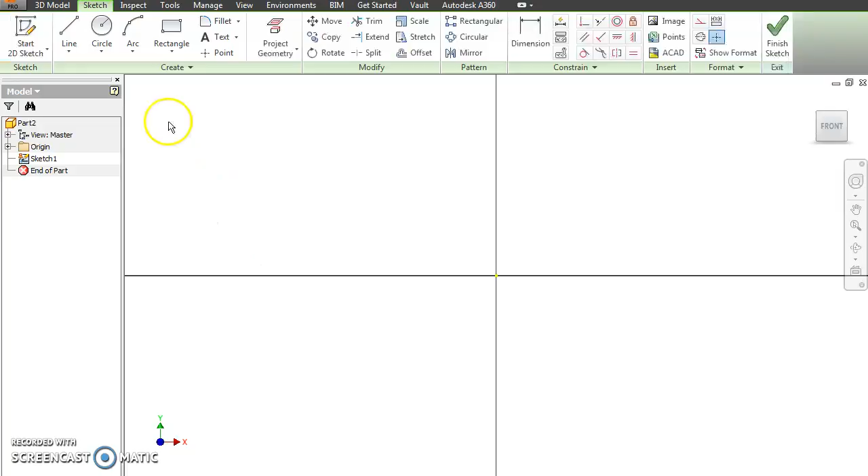Basically, what loft does is it takes one shape, and it has to be a closed shape because it's just like an extrude, and then matches that to another shape and kind of blends between the two. So let's start a 2D sketch, and I'll do something similar to what we have in the exercise. We'll make a block and extrude that. We'll go quite that far.

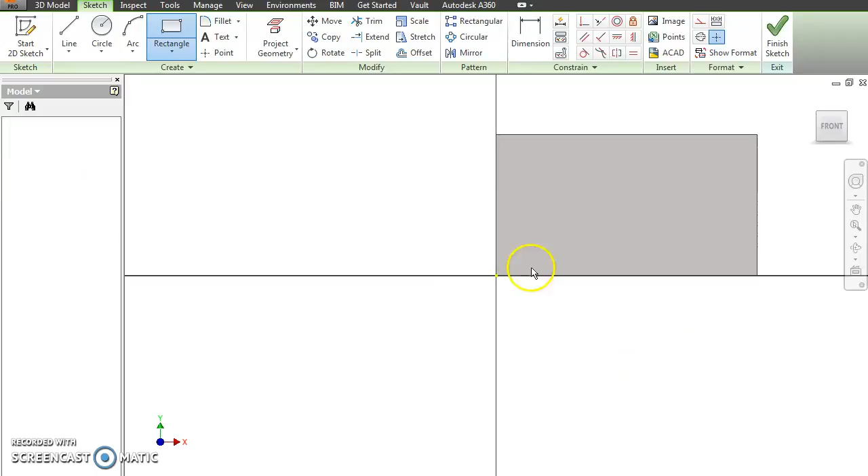There we go. So you start off with a block, and now we have to cut two different V shapes out of it. What I tell people is to start simple, all right? So go with just 3 lines, no dimensions to start off with.

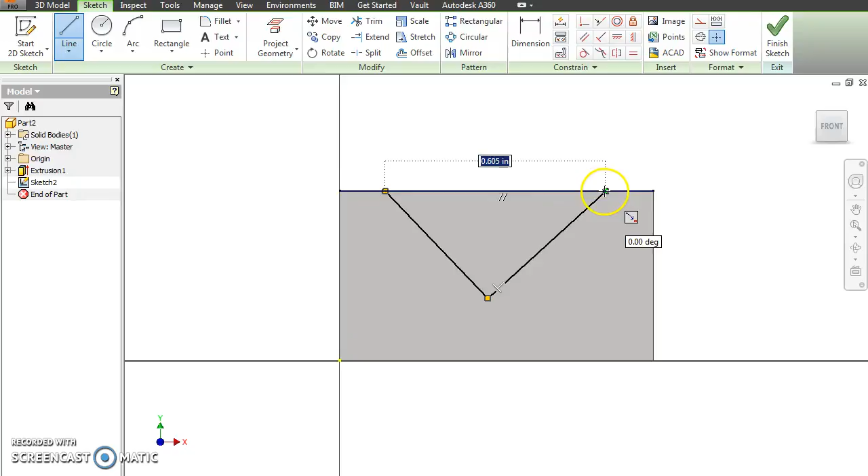Because you want to make sure this is closed. Most times, 9 out of 10, maybe even more, when this goes bad, it is because you have drawn it wrong, so you either have extra lines or the lines aren't closed. So once you get 3 lines and 3 lines only, what you want to do is grab the corners and see that they move, so it doesn't open up. Grab each of the corners, and you'll notice the sketch stays together.

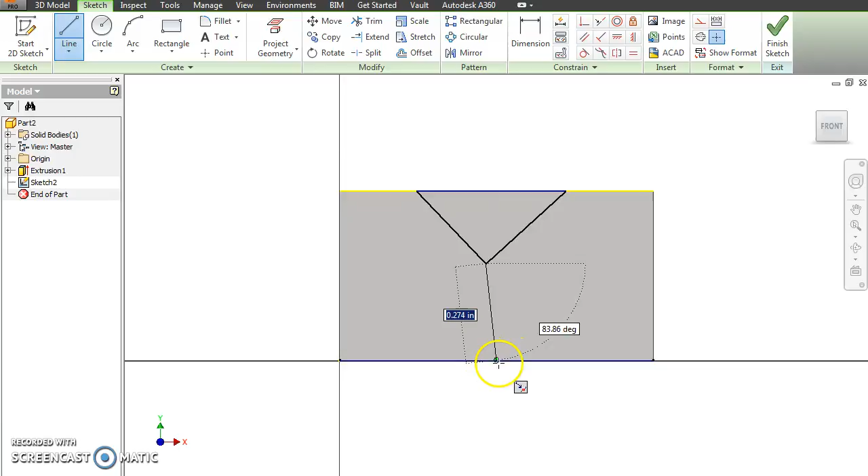The other place, the other 1 out of 10 times a problem occurs, is you want to put this in the middle, so you go from the end of that point to the midpoint of this one, and say I want this to be vertical, and that works great. But you forget to change this to a construction line, and then you can't tell where's the inside and where's the outside. So right click to give that construction, and that's going to work.

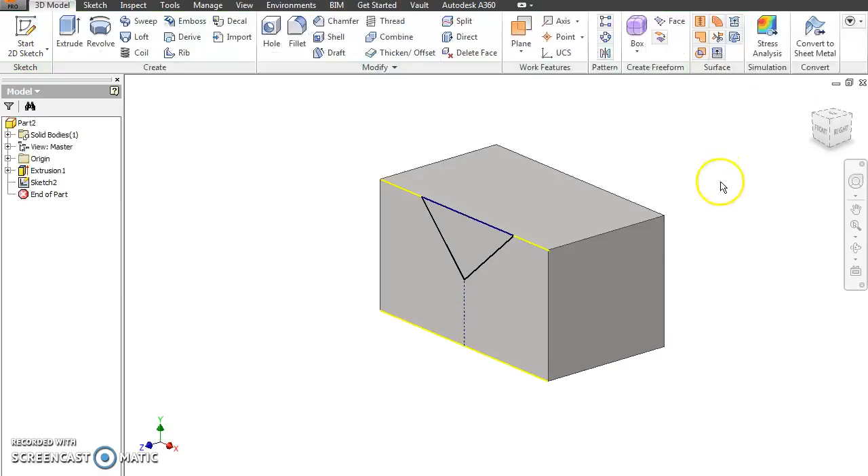I personally leave off all the dimensions because it makes it easier to debug at the very start. So let's finish that sketch, go around to the back side, make another sketch, and I'm going to lay in the 3 lines.

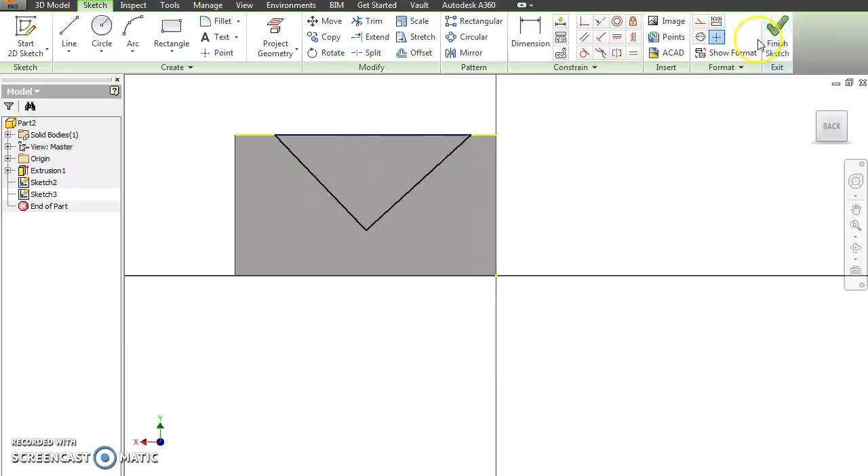Got those laid in, test it, drag it around, make sure they don't open up on you. There we go. You can drag it around and then just undo, and it all goes back, so it's all good, it's all cool. Once again, no dimensions. Finish the sketch, and now we're going to go to the Loft command.

So we click on Loft, drag this over to where we can see it, and here it doesn't automatically do it for you like Extrude does. So we're going to say sections. Remember, it goes from section to section. So we click to add, and then pick a section.

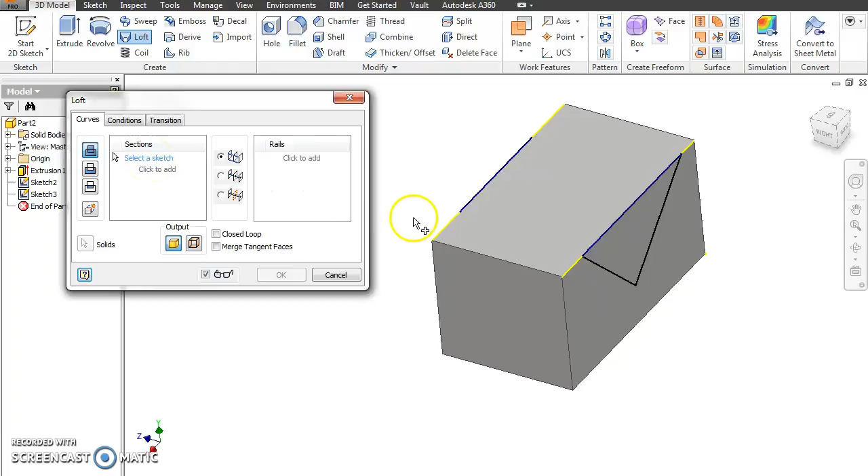So we're going to pick this section, and when we pick it, if it works, it changes colors. If it doesn't work because you have a problem, either it's open or you have multiple lines and can't figure out which line you want to do, it will simply not work. It will not allow you to add it in.

Same thing here. If you click to add and then click on the sketch, if it doesn't work, this doesn't appear, this doesn't add the second sketch. It just kind of seems to fail. So make certain that you have a closed sketch with no extra lines, and all your extraneous lines that are helpful to build it are construction lines.

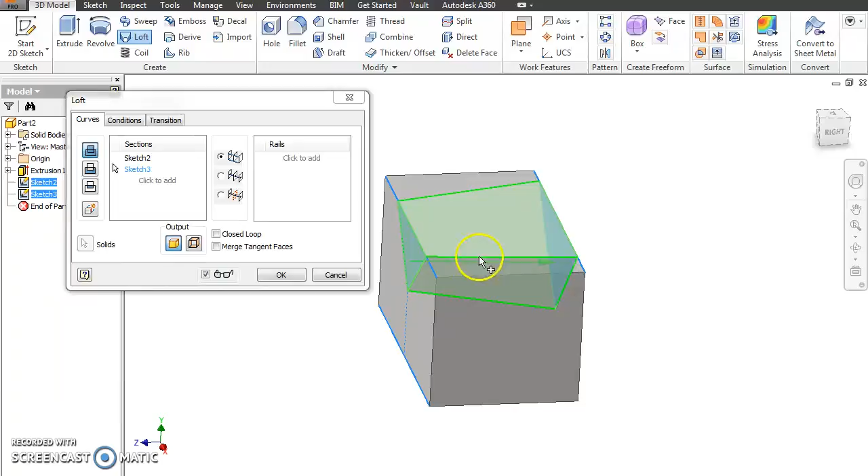So once you do that, you can see it takes that first sketch and maps it back. It just makes a straight line between it. I see kids putting a line in—you don't have to do that. It does it all automatically.

Let's tell it to cut, and it's going to cut through, so you can see it cuts through. Now what you can do is open up your Loft, right click your sketch, and now you can go back in and start putting in dimensions. That way you know it all works.

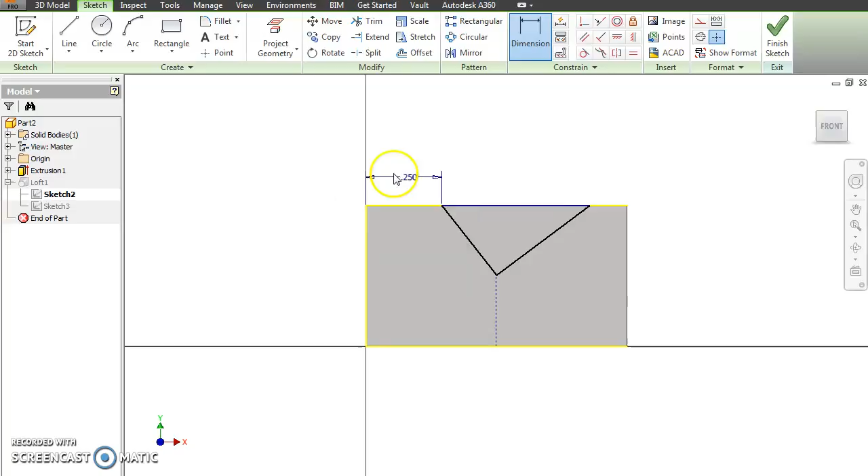So let's say 0.25. I have no idea what these dimensions really are, you have to look down at the exercise. I'm just currently making them up because it looks pretty good. And let's say, oh, that's already defined. So there we go. So finish the sketch, and it automatically updates.

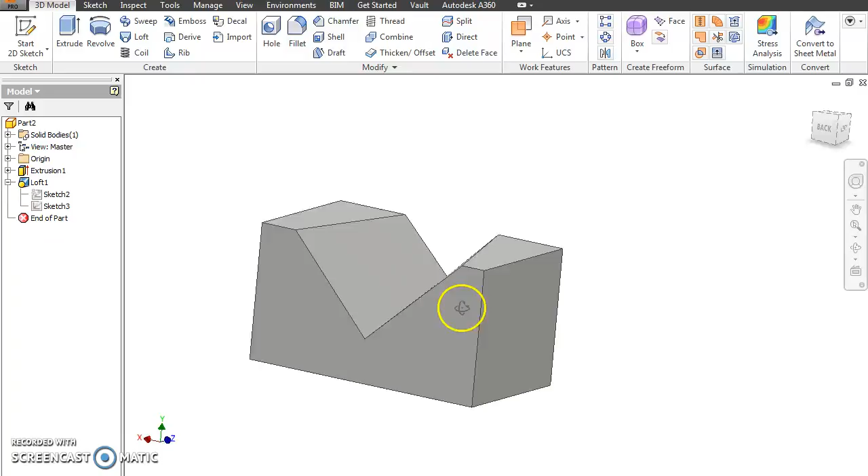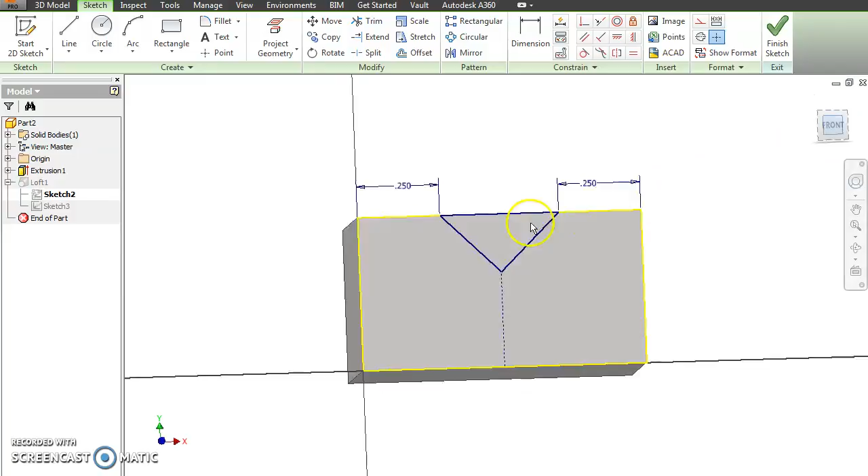The only other thing that I see people doing is occasionally they will get a little thin sliver up here, like it will cut through, but then you'll still see a line or a face that goes all the way through. What's happening there? If we look at this sketch here, what happens is this blue line here is not coincident with the top of this.

So you have to go in and make certain—and I should get an error here because mine are coincident, so adding this constraint will over-constrain the sketch, that's because it's already there. But if you're having that trouble, go back and look at that. So hopefully this helps, guys.